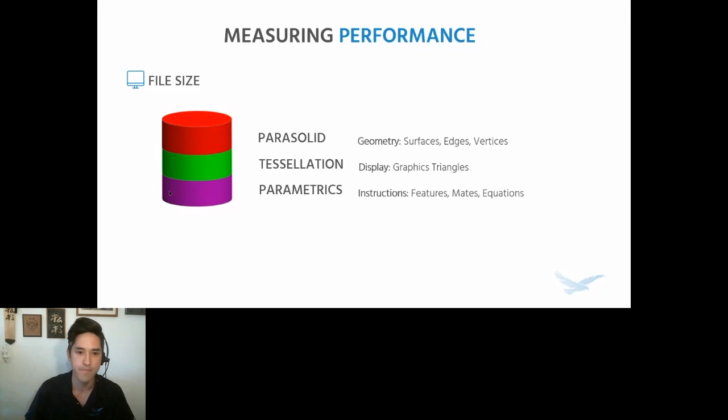All right, next, let's just quickly talk about what happens when you open an assembly. So I'm just going to stay in the assembly realm here and not get to the continued process when you open up the assembly drawing. But the first thing that has to happen is you have to load all the reference parts. That's pretty obvious. You have to get the part files, the sub-assemblies, things like that.

But the mode that you open things up into and any simplification measures could really affect this. So for instance, we were just talking about the 3 parts to a file. If you open up something in lightweight mode, it's not bringing in the parametrics. So it's only bringing in the geometry and the tessellation.

Then it has to go and update parts. So if you've ever opened up something in lightweight mode and you're like, wait, why did some of my parts or sub-assemblies not open up in lightweight mode? Well, one reason might be that they're just out of date. So if you add a feature to a part, the next time you open up an assembly, it's going to be resolved until you save that assembly. Then it can start opening up lightweight.

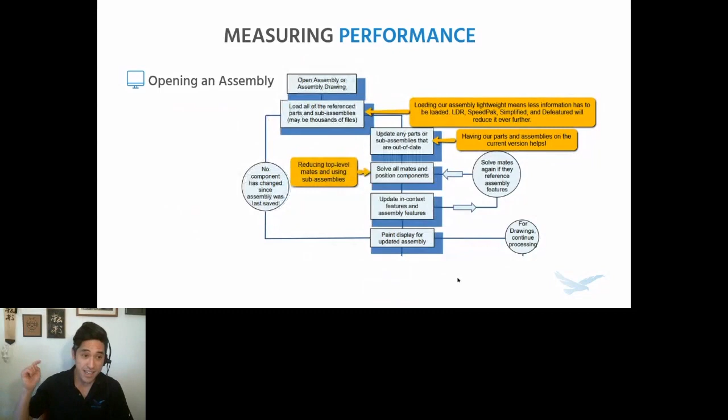All right, then one of the big pieces we can control is it has to go through mates. So it has to deal with any mates that need to be solved at the top level. And the biggest thing to do with this is sub-assemblies, right? So sub-assemblies hide and store lots of mates down inside those sub-assemblies that don't need to be evaluated at that top level assembly unless you have flexible sub-assemblies.

The next thing it's going to do is it's going to update any in-context features. So if you have externally referenced components or you have assembly level features, and you can see that kind of hidden underneath here, the next thing, if I go back up here, it cycles back up to solving the mates again if they're referencing assembly features. So if you can avoid putting a mate onto a patterned component, like the instances of those patterns, that's good because you don't want this to have to cycle back up through there.

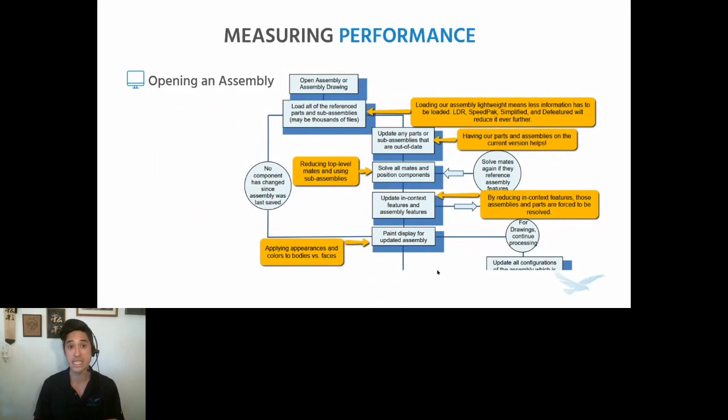All right, and then finally, the ultimate nightmare. Finally, we're going to be applying appearances to bodies and faces. So this is another thing you can control. A lot of times, appearances will be attached to faces, and there can be tons of them in there without you really realizing. And that's something we can deal with, and that can really affect open time quite a lot.

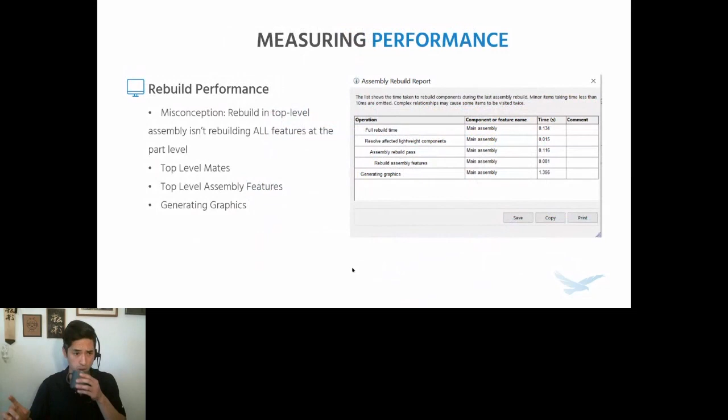Okie dokie. Next thing is rebuild. So there's really only two things I want to mention about rebuild. One, rebuilding does not rebuild all of the features at the part level. Especially if you think about lightweight mode, lightweight mode doesn't even load the parametrics, doesn't load those features. So the assembly rebuild of whatever assembly you're working in is really going to be looking at those features, which are like mates and assembly features, external references, anything like that. And then it has to generate graphics.

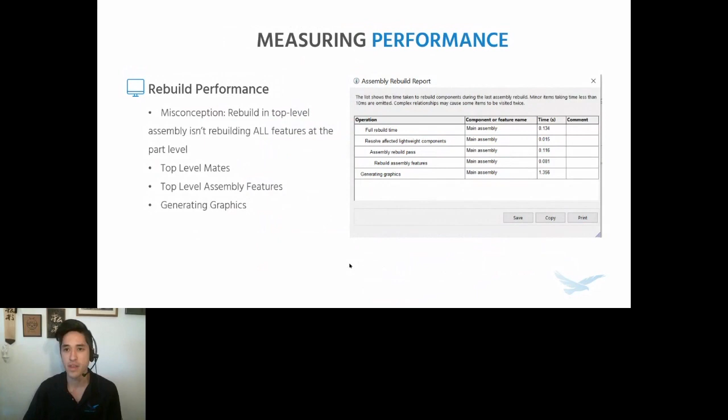So, all right. And lastly, dynamic view manipulation, which is essentially just the fancy pants way of saying panning and rotating and zooming, anything that changes what our screen needs to show us, right? Your graphics card's gonna have to work on this. So having your updated graphics card driver, we're probably always being told. And then in the last couple of years, we have that graphics pipeline, which can actually really improve your graphical performance.

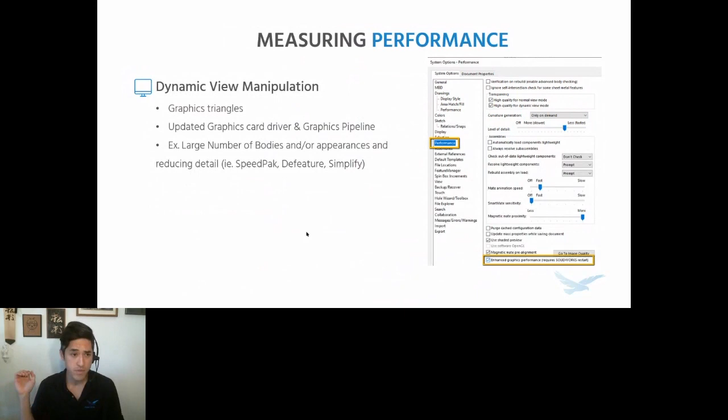In terms of your control over things, you have control over the number of bodies and whatever kind of detail that you could pull out of those. So any kind of simplification measures or anything like that will help, or even just hiding things. If you can't see it on the screen, your graphics card's not creating it for you. Okay, so those are our basic measures: file size, open time, rebuild, and our view manipulation.

All right, so our troubleshooting tools, these are the classics. If you've ever sat in any of these assembly talks or went to training or looked it up, you've probably come across performance evaluation and assembly visualization. And the reason why they always keep coming up is because they really are that important. They are the best tools to sniff out your problem parts.

And a lot of this, you'll hear the 80-20 rule quite a bit. It's basically saying 80% of the benefits come from fixing 20% of the problems, or there's a lot of different variations of it. But this is going to help us find the 20% of components that we can work on to get most of the benefit.

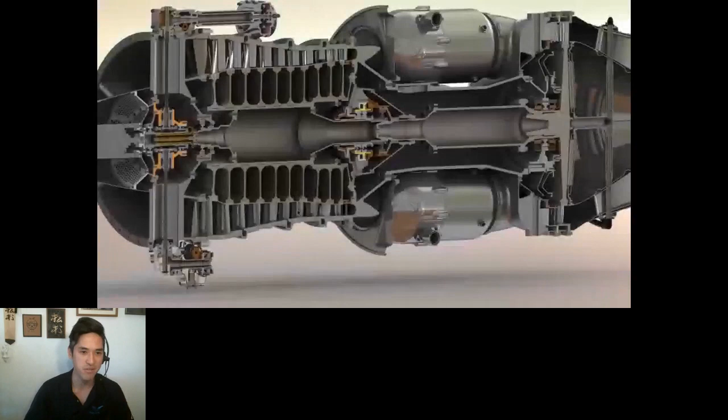Also, as a side note, if you didn't know, 80-20 aluminum, that company with all the extrusions, it's named after that rule. I always thought it was something to do with dimensions, or maybe aluminum content or something.

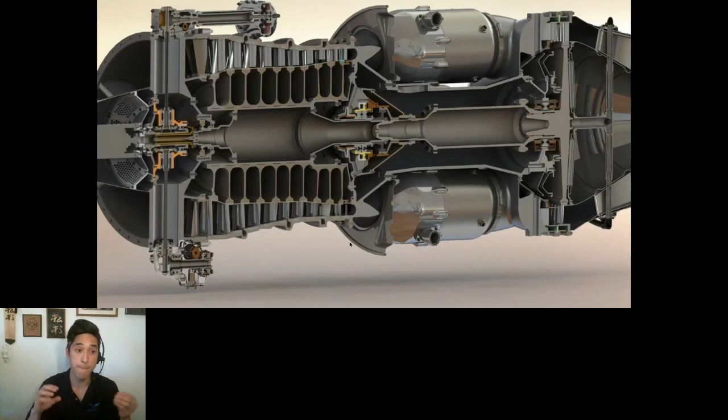I don't know if it's necessarily massive on the scale of some people's range here, but the point was that I didn't know anything about this assembly, and I wanted to go through trying to simplify it. So what can I do to make this thing run better? So let me go ahead and show you this real quick. Okay, so you should be able to see my SOLIDWORKS now.

This is an Orenda jet engine, and I got it off of GrabCAD. So if you've never used GrabCAD before, it's an online repository. It's like a public library of CAD models. And I just went up there. I was like, okay, I want something that wasn't made by SOLIDWORKS, wasn't made by Hawkridge Systems, wasn't made by me. I don't know anything about it, and I want to open it up and start working on it.

And I also had a goal of doing the least amount of work, because I can only show you guys so much. I don't want to make this a thing where you need to spend your whole life worrying about every little issue and every little area where you could possibly simplify. Where are things that you can quickly and easily change to affect the model's performance? And the other part about it is it's a really great model. I wanted to make it so that this is still a workable model, something that we can be affecting change on, and we can continue working on it, right?

On top of that, it's a GrabCAD model, which means it's not my model. It is Dave Rutland's model. So thank you very much, Dave. It's a beautiful model, as you'll see more and more. If you want this, you can go on GrabCAD and get it yourself. Just look up Orenda Jet Engine. It's a Canadian jet engine company that I do not believe exists. But Dave literally just bought the detailed drawings online and then started making everything in SolidWorks. And it's great. So go follow Dave. Maybe give him some work, because I guess he's a self-employed service engineer. But I wanted to not mess with Dave's model too much, but just see where I could get improvements.

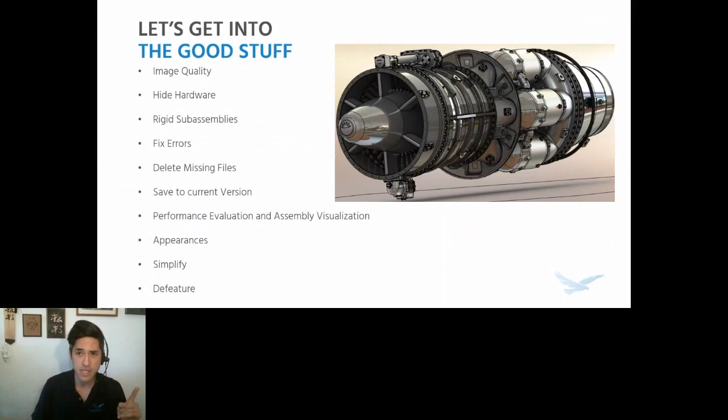All right, so what are we going to do? Well, these are the steps that I went through in order to try to improve the performance of this model. And once again, a lot of these things aren't even tools or really big major changes. Some of them are just things that you have to deal with in any model or assembly. And once again, the name of the game is not messing up Dave's great model here. So the first thing that I did is I went into image quality. I started with this because as soon as you open it, you can make this change and get a lot of benefit from it.

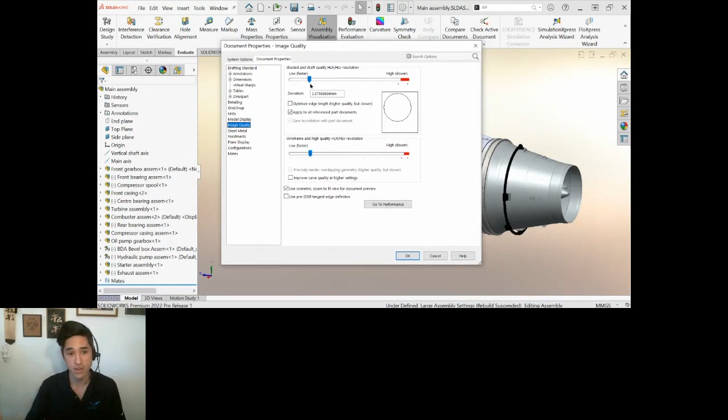So the original location of this, if you go into your document properties, image quality, was about halfway. And this is another thing that you've probably been told over and over again: watch your image quality settings, and don't have it up there. But all of Dave's models were about halfway, which leads me to believe that it was a template. So that's really the best place to start, changing your templates to be lower. If you're using the SOLIDWORKS defaults, it'll probably be somewhere around here. But watch out, because sometimes we pull this slider up to get a better screenshot, or we're sending the tessellation off to a photo renderer. You want to pull that down eventually, because it has a huge impact on the file size depending on how detailed the tessellation needs to be.

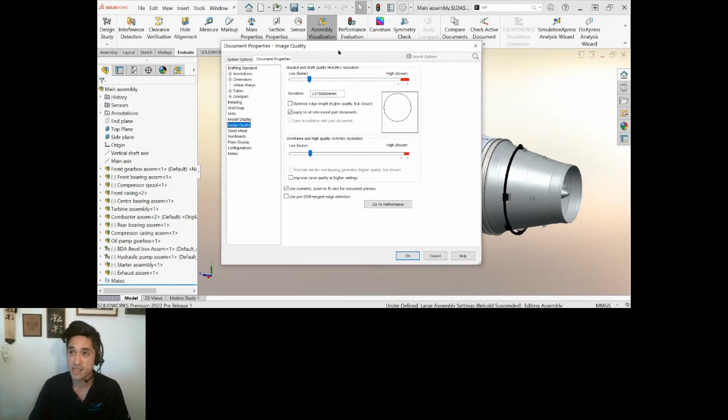So my general rule is any kind of small round thing relative to the rest of the model is going to be your problem. The biggest culprits are always bolts and ball bearings, where the ball bearings are actually modeled, because they're small and they're round. Small curvy stuff is a problem. This has hundreds of fasteners. There's over 900 fasteners. And then it also has hundreds of fins, little turbine fins and compressor fins, and they're relatively small and definitely curvy.

So the only thing I really want to mention here is there's this option, apply to all referenced part documents. Just as a heads up, you need to have things resolved, because you need to have them loaded on your computer when you make this change, if you want that to push down to all those part files. And it's part files, not assembly files.

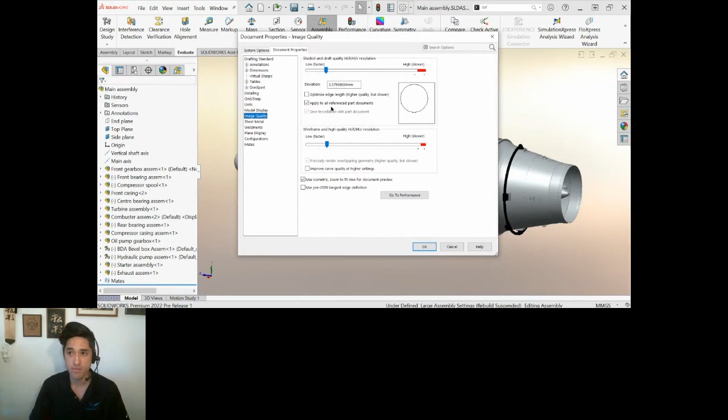Now, whether or not you have it fully resolved, it will still affect this assembly. So you'll still get the benefit here. But if you wanted to automate the process to push it down into further lower levels, then you want to have them resolved when you do that, or do it per sub-assembly if that's easier on your computer.

Now, the other thing that's really nice is if we go into one of our tools here, so performance evaluation on our evaluate tab. Performance evaluation has these general areas here, so I can see which files are opening the slowest. I have my general graphics info, so which ones are the graphically heaviest. And then right below that, I have my shaded image quality. So this will tell me what components are still at a higher or a medium in this case, because there's also a high section here. And you can see these are all assemblies.

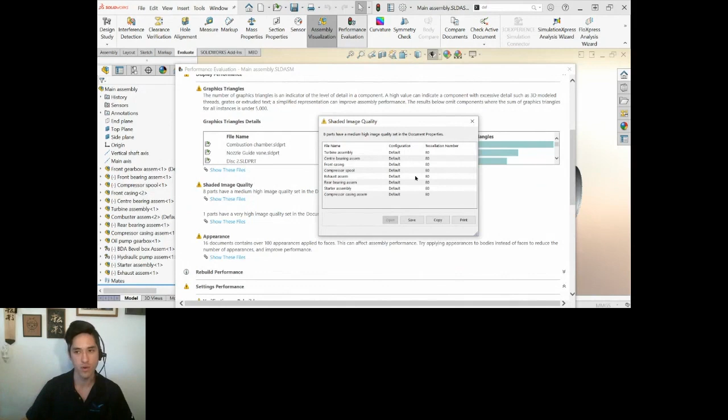So once again, I resolved the whole thing, I moved that slider and then saved the files here. But my sub-assemblies still need that work. And that's just something that as I go and work in those sub-assemblies, I can go and make those changes there. Okay, so in terms of how much did this actually change things, right? So I'm harping all on this image quality and you're going, oh, come on, Sean.

Well, Dave's original settings looked like this, so about halfway, and it was 125 megabytes. When I pulled it down to this fourth tick mark here, it went from 125 megabytes to about 77 megabytes. So almost a 50 megabyte swing just from pulling that slider down. Now, this is just the assembly files. Remember, all those other part files can also pull that down.

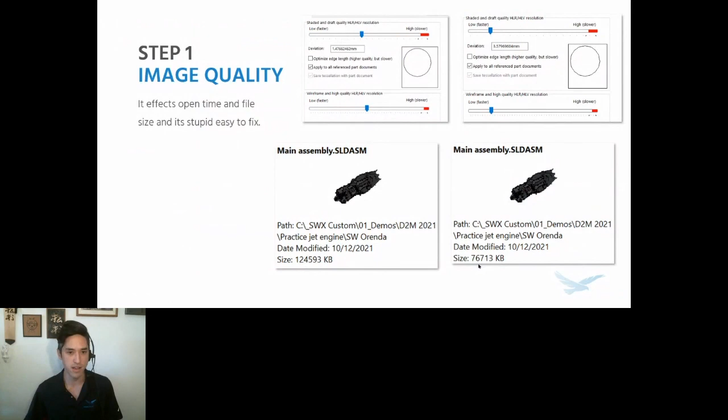And the amount of small curvy things you have will be a huge influence on this. If you have a cube that has a bunch of flat sides, it doesn't take a lot of graphics triangles, so you're not going to see a big change there. Now, let's see what happens if I put it down to the lowest level. If I pulled it down to the lowest possible level, it goes down to 37 megabytes from 125.

Now, the problem is it looks terrible. Essentially what that slider is doing, it's the deviation from the real geometry to the tessellated geometry you're seeing on your computer. So once you go past that fourth tick mark that I have it set at, it really starts to degrade pretty quickly. And in that case, it can make it difficult to even select things, right? Where edges seem to be on your screen won't actually be where they're at. So that can make it difficult for obvious reasons.

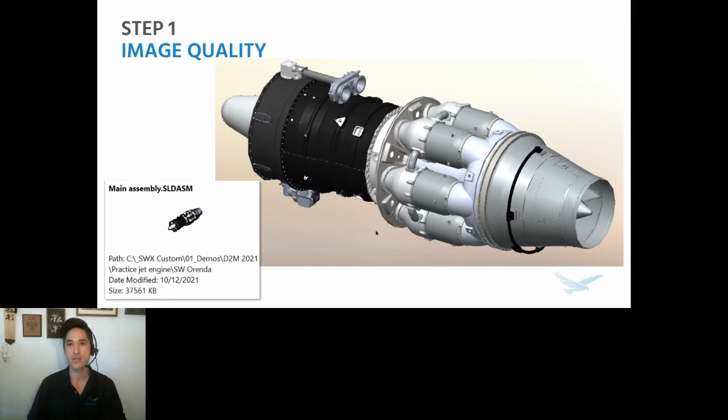Okay, so let's move on. What did I do next? Okay, I hid the hardware. So that's another pretty quick, easy thing to do. And remember, I was saving a lot while I was doing this. I was opening and closing things a lot. And I wanted to try to speed up that process as much as possible.

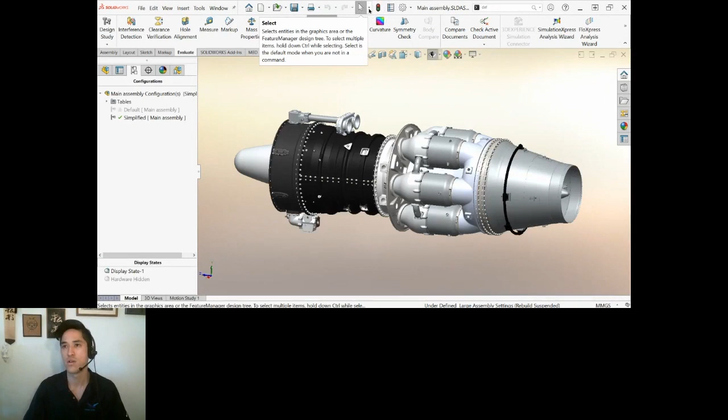So doing this is pretty easy. Let's go back to display state 1 here. And then what I'm going to do is use my selection tools. So up here or on your F5 filter toolbar, if you use this, or if you just want it on the screen, you can use select toolbox, but Dave didn't use the toolbox. He actually made all of these parts.

Like every single part in here, as far as I could tell, was made by Dave. So, I mean, hey, that's great. Select by size is the next best option just because relative to the rest of the assembly, hardware is usually small. And then essentially I use that as my first run. And then as I was working, I just keep adding to the display state by using select identical components.

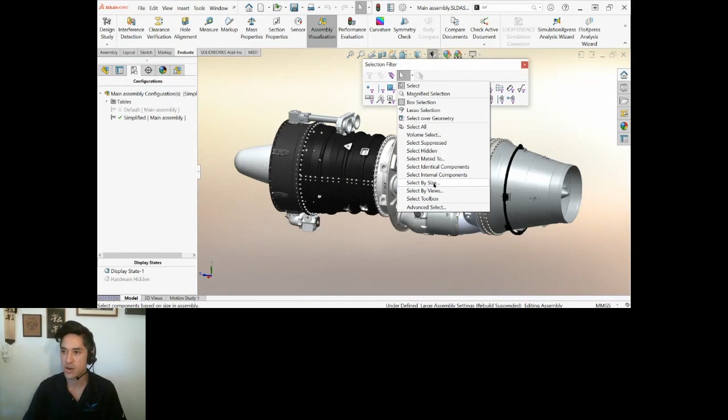So essentially all I would do is say select by size. I use the dynamic option here so I can see on my screen where they're highlighted, and then you can put a percentage in here. So let's say if I put 1% in, I get just under 400 components. 3% seemed to be about the right place to go, so about 974 components.

The one downside to this tool is you can't rotate while you're in it. So the position you're in is what you get right now, but once you say okay, then it's just selecting and then right click and hide. And remember, if this is saved in display states, they are lighter weight than configurations. They also switch back and forth faster. And then anything else that I'm hiding as I go will just continue being saved in that display state.

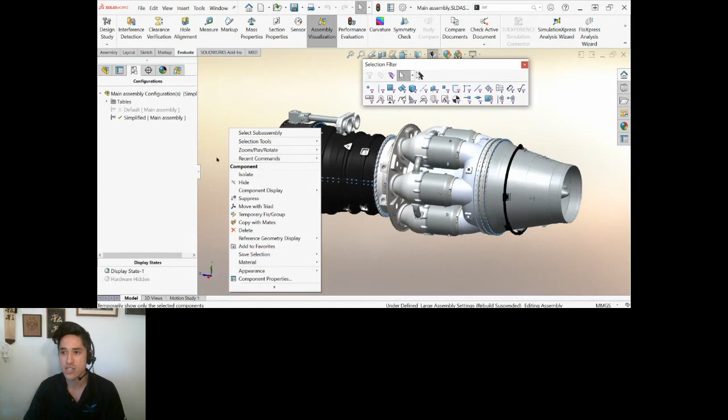Now, when you're doing something like this, and I just selected 974 components, how do I know if I didn't over select things? Well, essentially what I do is I go over to show hidden components on the assembly tab, and that will flip flop. Everything that's hidden will now be shown. Everything that was shown will be hidden. And then you just select components that you want to toggle back to being shown.

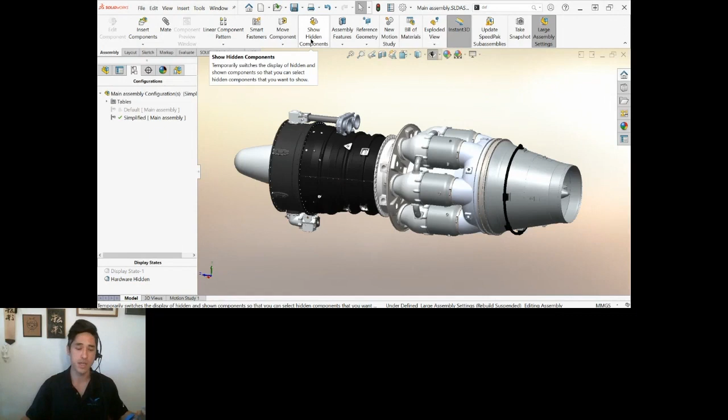So if there's anything that was overdone with this auto select option, you can fix it with show hidden components. And I actually have a little screenshot of that just because it's actually just cool looking. So go down here. This is what it looks like when you do show hidden after that.

I have a good question here. If they're acting as if they're suppressed, will other components lose reference to that part? It'll probably suppress the related mates and things like that. So half the time I'm using it stay loaded, half the time not. Remember, it's just a display state, so it is pretty quick to flip-flop back and forth. For this presentation, I just have everything resolved because there's a lot of operations that you still want things to be resolved for, and I don't have the time to be flip-flopping back and forth.

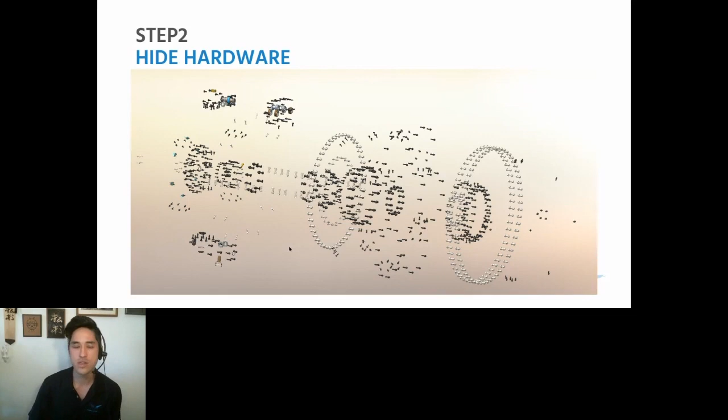Okay, so in terms of the actual effect on this, this is a snapshot from assembly visualization, our visualization tool, which I'll get into in a moment here. But you can see the total graphics triangles of the assembly. So before they're hidden, they're just under 8 million graphics triangles. After just hiding all those hardware components, it was about 4.4 million.

So not quite half reduction, but it's still huge in terms of what my computer has to deal with, especially while it's running this webcast here. Now remember, your mileage may vary because it's dependent on how much hardware you have, and Dave had very detailed bolts, so hiding them really helped a lot. Okay, let's move on here.

Okay, the next thing I did was rigid sub-assemblies. So Dave had 4 flexible sub-assemblies in this file. Now what that does is it brings all of the mates from those sub-assemblies up into the top level for when they're being solved. And so that's going to affect your rebuild. It's also going to affect your open time because it has to deal with those mates. I have a good question here about number of mates in a large assembly. I will talk about that in just a moment because you might be seeing this under 300 mates thing here.

But real quick, how do you do this? It's really easy. This is the moment where you do want to use a configuration. So I didn't use the configuration for hiding components, and I didn't want to suppress those components because that hardware wasn't actually put in at this level. They're all in the sub-assemblies, so suppressing them will affect those sub-assemblies. Hiding them is just here in the file.

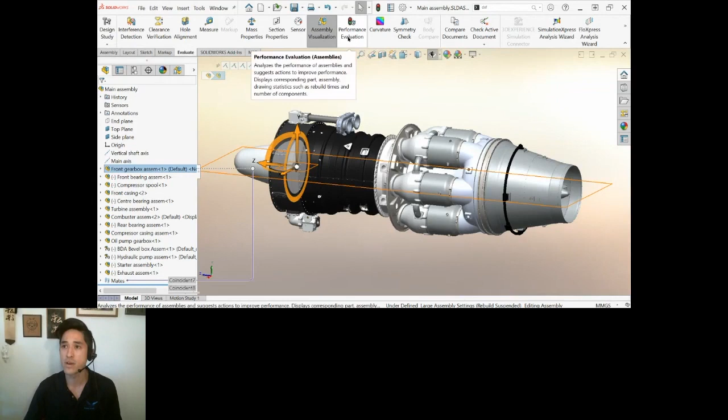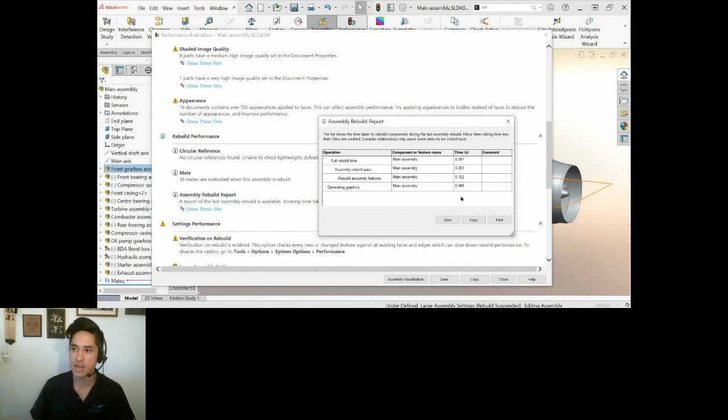And then in terms of the effect, well, if you go into your performance evaluation, there is a rebuild performance section here, and it'll tell you how many mates were evaluated when it's rebuilt. You can also use this little rebuild report here, and it'll kind of break down the last rebuild to see if it was really slow all of a sudden, or you're not sure why. It'll break down those little steps and what caused the slowdown.

Now, compared to the flexible subassembly, it had 648 mates. So it went from 648 down to 38 by making it rigid. Now, once again, mileage may vary because this is very dependent on what your mating scheme looks like. Dave did a really good job of having sub-assemblies at the top level of this, but there's not many sub-assemblies lower down. So the depth of this assembly is not very far. So we could probably improve performance at those sub-assembly levels by having further sub-assemblies down there.

Now let's talk about this 300 mates situation. So I have said 300 mates many times, and I didn't really know why I was saying it, just something I heard, it made sense. Okay, what it really is, is that the time it takes to solve mates is proportional to the number of mates squared. So having 300 mates is a lot better than having 400 mates because 300 squared versus 400 squared. It really just becomes you want to have the least amount of mates possible, but having a large amount is really going to degrade performance a lot faster because it's exponential.

And then as Ryan's saying in the chat there, any of your standard mates solve faster, and it doesn't actually benefit you to have a fully defined assembly. So you don't need to do things like locking the rotations on your concentric mates. If you can avoid distance mates and angle mates, those are slower. Any of the advanced or mechanical mates are also slower in general. But if you can remove number of mates, so someone's saying, what about width or symmetric or maybe profile center? If you can remove the number of mates by having those ones, you could see a benefit there.

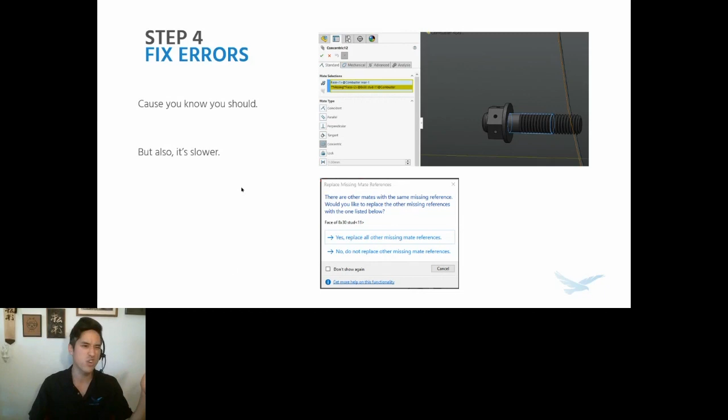But if you have a true over-defined mate situation, that is something you want to figure out, because the mate tool is actually really good at having over-defined mates where they are in accordance with each other, so they don't conflict. But once they're conflicting, that really slows down your rebuild or anytime the mates have to be solved. So here is just a quick little bit of information for you. So just go ahead and read through that while I get a sip of coffee here.

No, don't read through that. Okay, so that is a solution from the SOLIDWORKS knowledge base, but really all you have to know is that part of solving mates is that SOLIDWORKS has to figure out the order to solve mates. So it has to parse this mate group here. And if errors are found, it has to go process those mates again and try to see if it can find a good result, or if it needs to put up errors or warnings. So when you have a true over-defining case where things are conflicting with each other, this will be much slower, right?

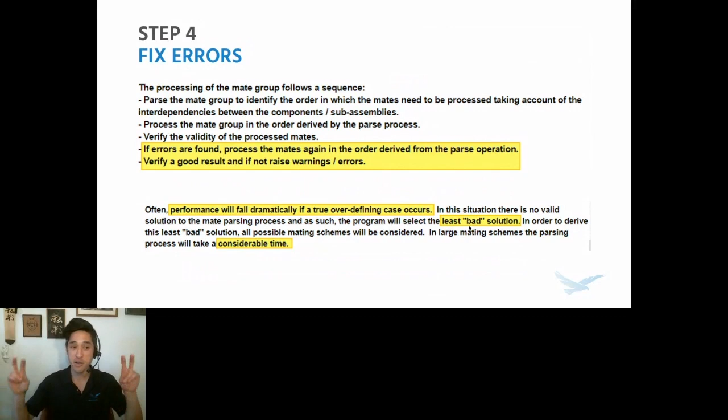And especially, I love this official solution from SOLIDWORKS tech support where they have the least bad solution. So there's that. But if you have things that are conflicting, that's just one of those, hey, who wants to see all those crazy colors? You got to go fix the mates.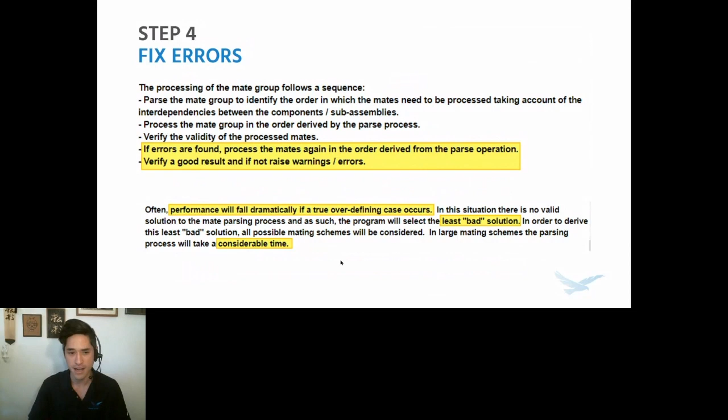Similarly, deleting missing files. This is obviously going to be very dependent on how many you actually have and how you got to delete them. I kind of waited because half of them were in sub assemblies, so I would have to resolve those sub assemblies to work on them, and I was trying to get as much performance boon as I could.

But the thing I just want to mention here is that when SOLIDWORKS cannot find a component, it has to go through 7 steps of searching for it before it asks you or decides or suppresses it. So if you have a lot of missing components, you got to figure out something to do with these. And this is another one of those, who wants to see these error messages over and over again every time you open it? But you got to either find that component or get rid of it, so it's not searching all over the place for it.

Okay. This is another kind of no-brainer here, but saving to the current version. So everything that Dave had was in 2019. So as I was working on things and saving, a lot of things were just automatically getting saved to 2022, which is what I did everything in. But at some point, I had to get all of the files into 2022.

Now, the benefits you're going to see from this will definitely vary because it depends on what version you're going into. Is the version you're going to, did they work on performance? Some years SOLIDWORKS puts a lot of work into just performance updates and improvements. And then if you have really old components, then you could see file size decreases and a lot of performance benefits.

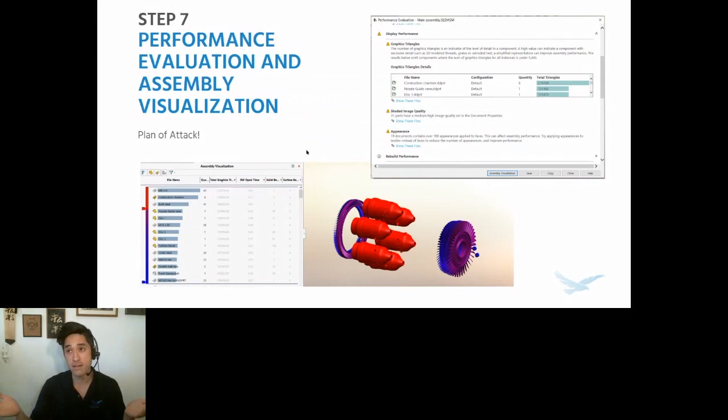So we have to use assembly visualization and performance evaluation to help us out. So where did I go first? Well, first I went to appearances. This is another one of these maybe weird ones that you might not have thought about, or you might not think is an issue. But if you go and take a look, the number of appearances that some files could have could be way higher than you ever would have expected.

So you might be looking on here and say, there's no way I have a file that has 4,000 appearances. You could have one right now, hiding. And this oftentimes comes from two places. So imported files. If you have an old IGES file or something that imported a million surfaces, it could break up the appearances into a bunch. It's not crazy to have a complicated imported file that has 10,000 appearances, and if that's in an assembly, it has to paint all those appearances when you go to open it.

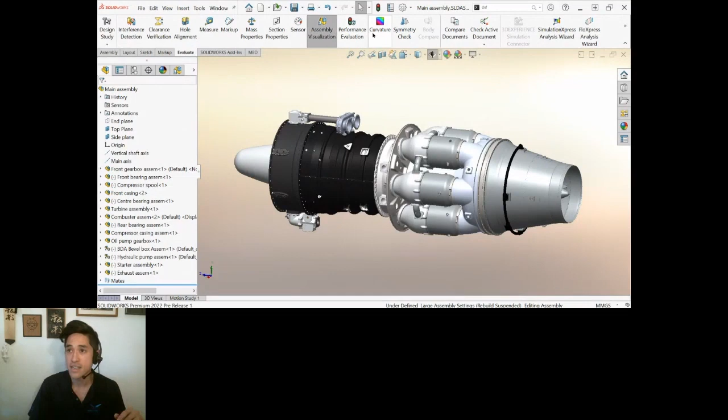So how do you deal with this? Well, Dave didn't have any imported parts that I could find. He made everything. So even in that case, how did this even happen? So in performance evaluation, I'll go down to appearances here.

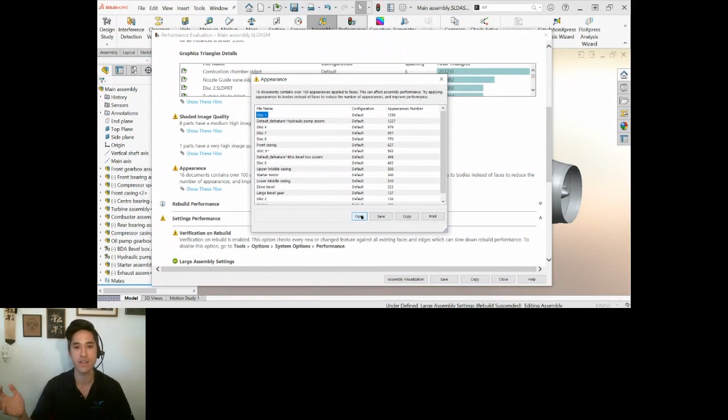And you can see I already did a little bit of work in here, but the nice thing with performance evaluation is whatever you're doing, you can go in and hit open on those files. So if there's a file that has some kind of issue here, then you can go ahead and hit open. It'll go open in the background. So let me jump over there.

Alrighty. Now we're not going to talk about the fact that Dave did a bunch of things as multi-body parts, and then never broke them out into sub-assemblies with like patterns and stuff, which is what I would have liked to see. But hey, we won't worry about that right now.

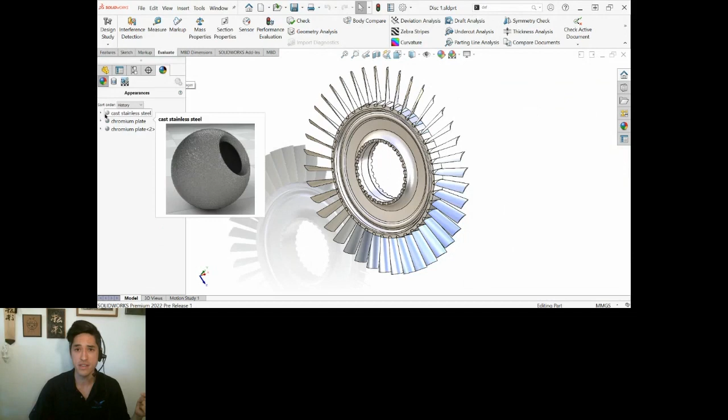So we go through here. We have 41 bodies. This is one of 9, I think actually 10 discs on the compressor here. And if I go to the appearances, okay, I got cast stainless steel on the whole part, no problem. Chromium plate, okay, this looks like a lot, but these are all just the individual bodies, so not a big deal. Then I got another chromium plate. Yeah, okay. So do we think Dave went and clicked on 1,209 separate faces? Probably not, right?

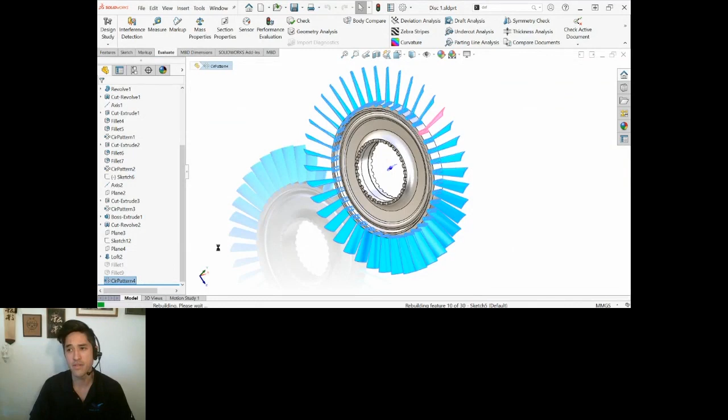So what this really comes down to is oftentimes in your patterns, if you're not really thinking about it, like this thing, it doesn't look like there's even that many faces, but there's a bunch of little tiny filleted faces on each of these fins. So if I zoom in to this area, you can see there's these little things to fit those in place, and then they're filleted on the edges here.

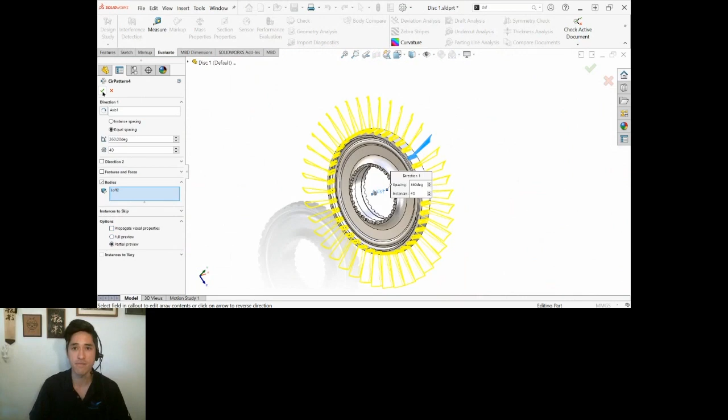And what happens is Dave did set the appearance originally to just that one body. And then propagate visual properties was kept on. So a lot of the options, especially in the pattern property managers, are sticky options. So they will just stay on every time you use it. So with that on, that is what broke that appearance off into 1,200 faces. So that was the whole issue. It's just that option being turned on.

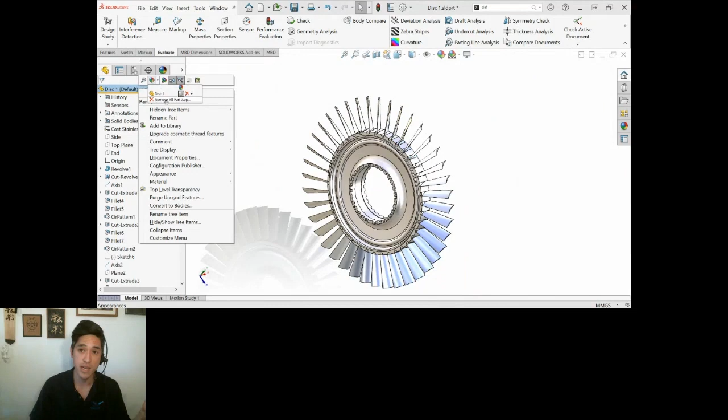Now, if you have an imported part or you don't really care to figure this out, there's 2 ways to get rid of appearances. If you want to keep display states, then you can always go to the top of your tree and remove all part appearances from that display state. Or if you don't care about display states, it should be faster just to remove all display states from here.

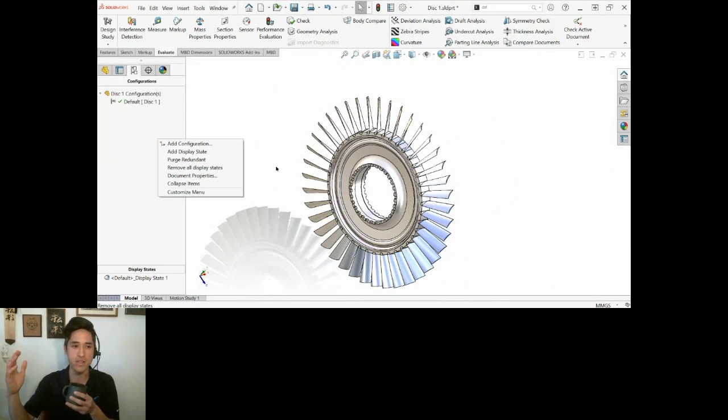Especially if you have the imported part problem, where you had like 10,000 of them, it is going to be slower to deal with them. So removing them all is probably a good way, and just start over and then add an appearance to the entire part file, or maybe bodies or something along those lines. Okay.

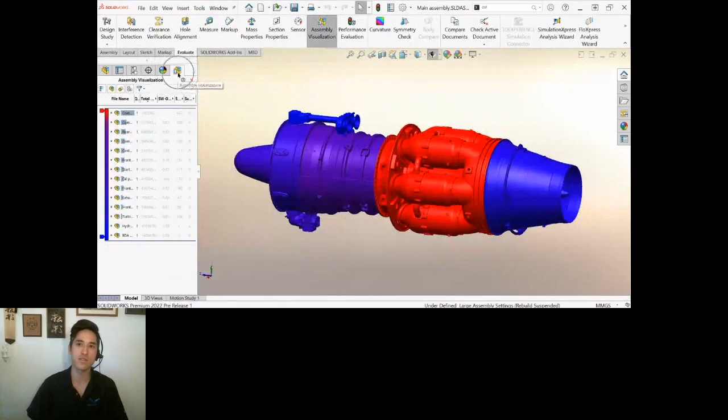So what's next? Well, we have to figure out where to focus our work here. So let's get into assembly visualization, because I haven't really gotten into it. Assembly visualization, you can see it was already on. It's on a little tab over here. And what it does is the graphical organization of your assembly. So I have custom little columns up in here right now.

So total graphics triangles is all the graphics triangles of all the instances of this thing. I've got my open time for these sub assemblies, as you can see, right through there. Number of solid bodies and surface bodies. Those things can also help you with imported parts once again. So if you're not quite sure at a top level, you can see, oh, why do I have something that has 400 surfaces all of a sudden? And then we can go deal with that.

Now, when you open this up originally, it's just going to have mass. So you can go over to the side and add columns. You can hit the more option, and that will give you the list of things that you can add to these columns. And then ultimately, you can save this as a style and then just load that into whatever files you're using.

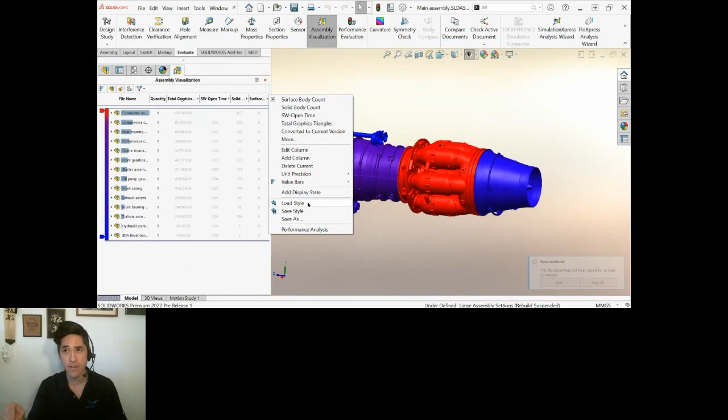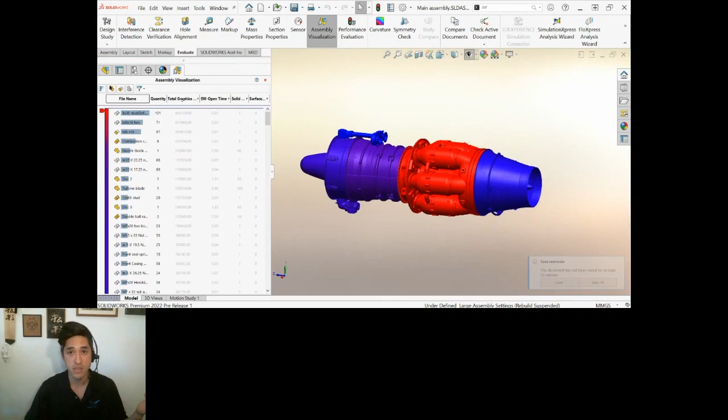If you create these styles and load it, every time you use assembly visualization in that file, it'll just automatically have these columns. So you won't have to keep changing it over and over again. Other things to note here is that there's different ways of grouping components. So right now I have it in the nested view, which will show me all my sub-assemblies. If I want to see just individual parts, I can undo that to flat view here. Grouping components, I'm going to keep it grouped because if it's the same component, I want it to be grouped together.

And then there's actually a performance analysis button that will just give you total graphics triangles, open time, and then the individual files rebuild times, not the assembly rebuild time, but the individual files. That one's not sticky though, so it'll keep going back to mass if you use that, but it's easy. So other than that, I can click on these columns to sort by whichever column, and then we'll end up getting it to be color coded based on that column.

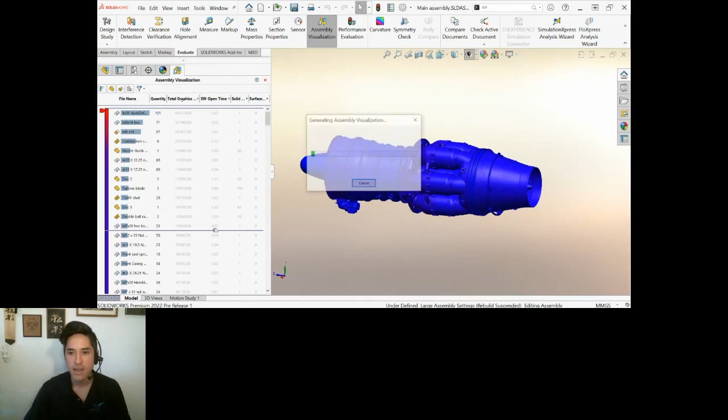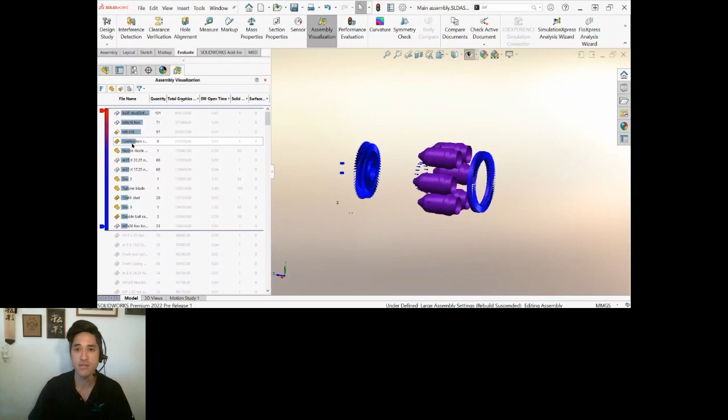The other thing that's not super obvious that I really like is if you go down to the very bottom, you can grab a rollback bar of sorts. And if I pull that up, I could say, let's see everything that is above 100,000 graphics triangles, and it'll go and hide all the other components. Now you can see I do have my hidden components loaded, so those will show up. So you can see my number one thing is actually that this 101 fasteners here is the number one single component. We can see other files here on our screen. Here's some of those cool compressor disks there.

Sean, if I can interject for a second, just because I want to add on this. I see this tool presented all the time as diagnostics for the graphics triangles like you're showing, but I also use this for some of those steps you did earlier on, like suppressing tiny little components and hiding them. I'll add a column for volume, and then I'll just sort by volume, and then I can just shift select the tiniest little parts in the assembly. And by using the assembly visualization, you can really see exactly what's going on, what you're hiding, what you want to eliminate and what you want to keep.

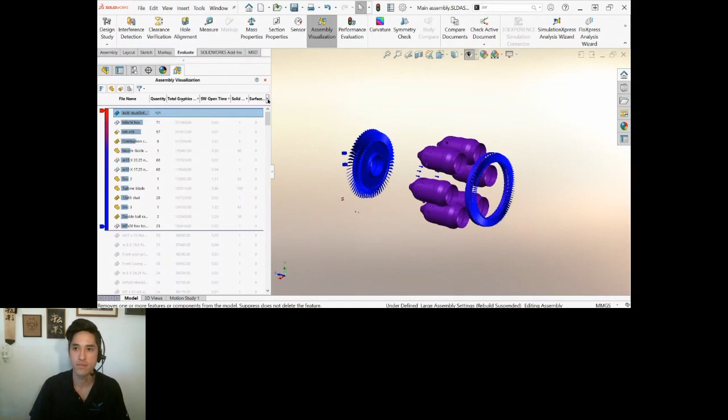So for things like if you're stripping down a model to share a STEP file and you don't want to have all the detail in there, or if you're prepping a model for a simulation, this gives you a lot of options in terms of how to sort and visually see what's going on inside the assembly. Yeah, that's great because anything that you're sorting through here, you can create as a display state. Whether or not you want the colors, you can turn those off, or you could have a different color system. But yeah, it's a really good way to save ways to sort your feature tree rather than always navigating through your feature tree.

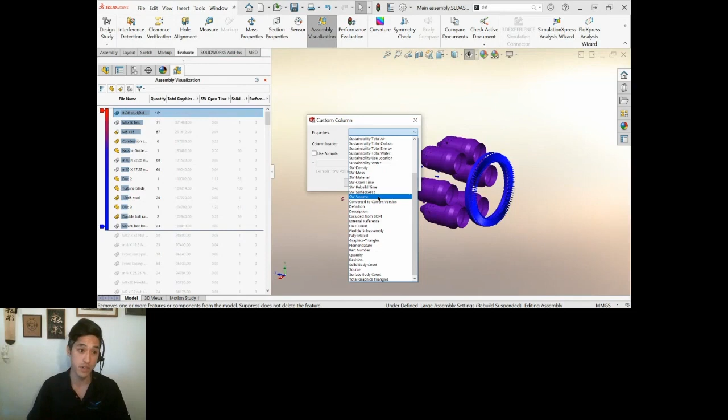So the combustor assembly, this big red area, by far has the largest number of graphics triangles. And then if I open this up, I can see that there is a sub-assembly that has the largest amount of graphics triangles just for that. So I have this combustor assembly that I can go ahead and open from here, or as Ryan was saying, it's really easy to go and hide, suppress, whatever your selections normally would have been.

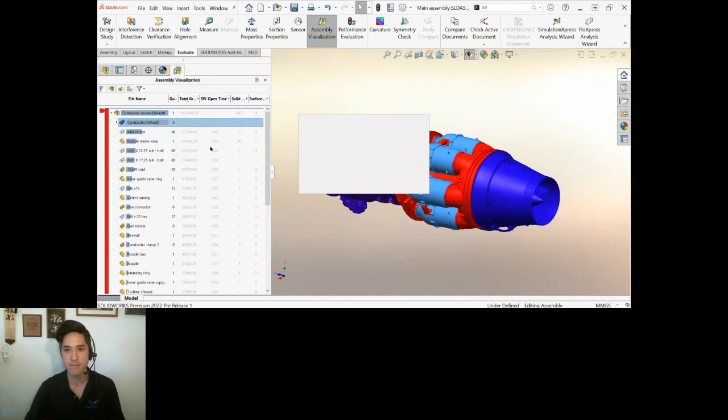And then what I'm going to do is, let's actually get to the two tools that I use to actually start making some kind of simplified version of these files here. Once again, these are things that you might have run across before, but I'm going to present simplify and defeature. They're very different from each other. Simplify I actually prefer, mostly because it's predictable.

I understand very well what happens when you suppress features or you unsuppress features, and that's all it's doing. So it's easy to use. It's fast, but it's fast for me. My computer may be chugging along trying to deal with this, depending on how many features it's going to find. And then the downside is it requires features, right? It needs to be something built in SolidWorks that it can then turn off those small features. And remember, small round stuff, that's what's really going to be getting you.

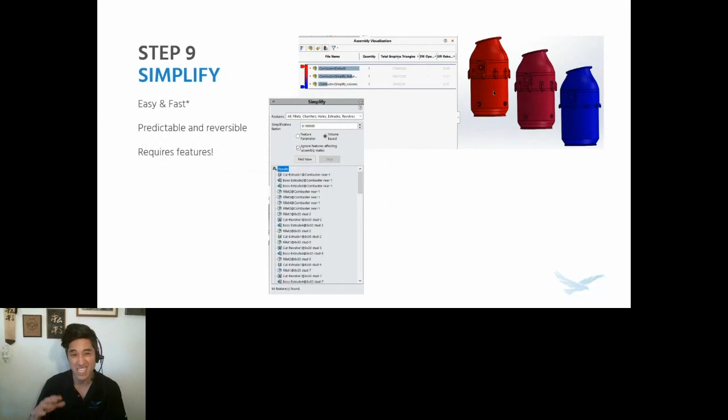The other reason why I specify on this combustor is there's 6 of them in that assembly. So if I can focus on just simplifying this, then I get 6 times the benefit. Let's go look up our simplify here. There's 2 options, feature parameter and volume based. Generally, feature parameter tends to find less features in my experience. With the default simplification factor, feature parameter is looking at the characteristic dimension of a feature, like the radius of a fillet, versus volume looking at the volume of the feature. They're both comparing them against the component's volume, whatever component you find that feature in.

I also turn on ignore features affecting assembly mates, but that's just going to affect this assembly's mates, not my higher level ones. So be forewarned, this definitely can cause you mate errors as you're swapping these out in your higher level assemblies. Hopefully, since they should all be mostly small things, it's usually pretty superficial, and oftentimes replace references can do a lot to help you. In this case, the volume option found 95 features. It's not usually that huge of a spread, 16 versus 95, but generally the volume one tends to find more.

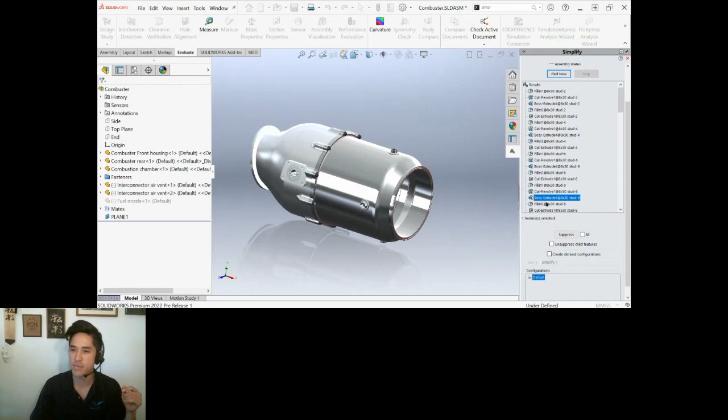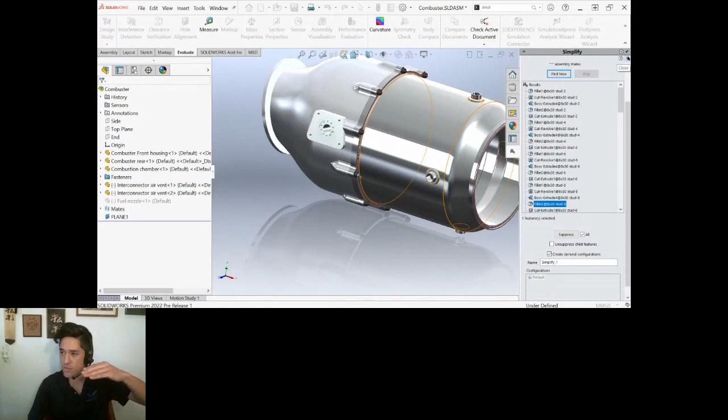I can see what they are. If I select on them, they'll highlight on my screen here. Looks like a bunch of them are for these little fasteners here. And then generally, I could say suppress all of them. And then I like creating the derived configurations. This is important because this is going to make a configuration for each of the components and the subassembly I'm working in and activate them all for me. It does take a second because it has to run through suppressing all those. So I do have a couple already created.

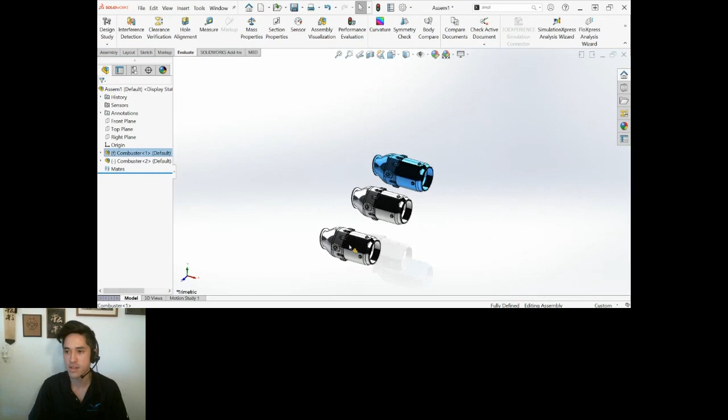The way that I like to compare these is still using assembly visualization, but I want to look at it like the top level. So sometimes I just make little dummy assemblies. I'm not going to save this, I'm just going to throw them in there. I've got 3 configurations, so I'll activate 3 of these here. Okay. And then I can run assembly visualization. This is one of those times where I'll just use performance analysis. This button right here, we'll just pull out graphics triangles, and we can see the difference here.

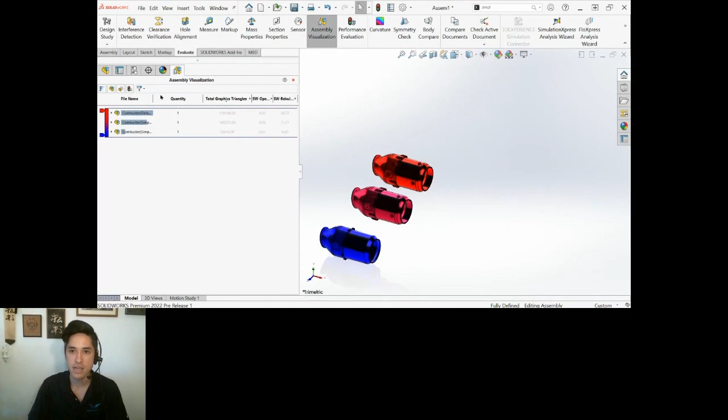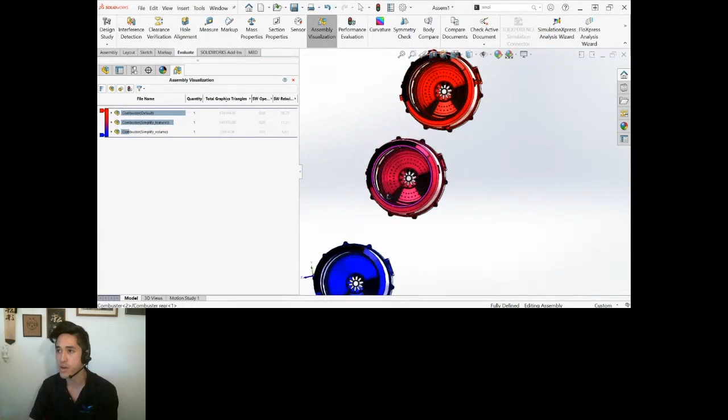The default has about 180,000 graphics triangles. Remember, we have 6 of these subassemblies. So 180, then we get down to about 145, and then we get down to 23. A lot of this is because of that bolt simplification. But if you look on the inside, there's a bunch of patterns on some of these components here, so that's probably where we're also getting a lot of benefit. Once again, the reason I like this tool is because it's predictable, and I don't have to swap out entire components, right? It's just changing configurations.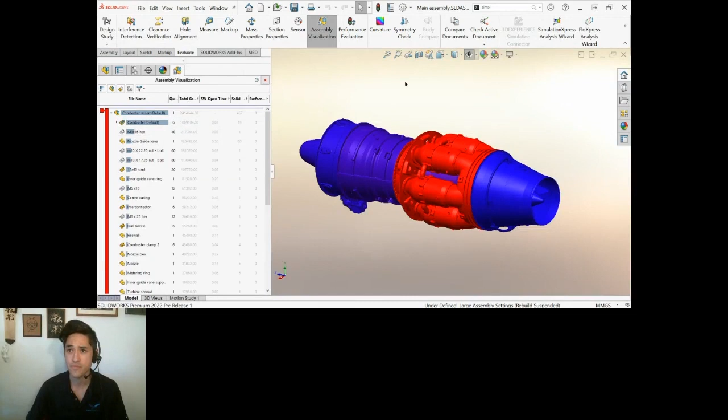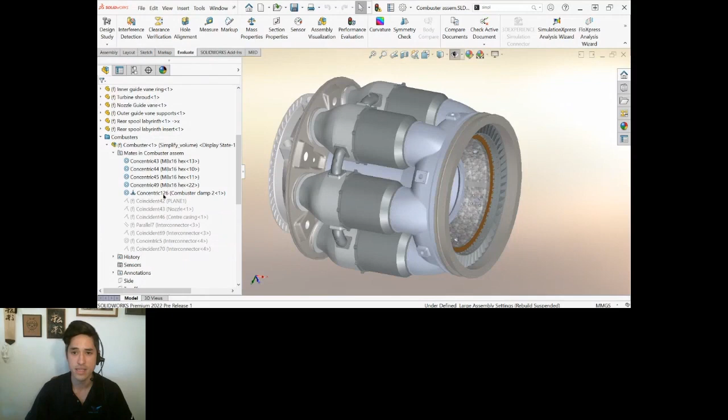So I now have configurations to use. Let's go off into my combustor here. I would still make a simplified configuration for the combustor. In that simplified one, I can swap out for my simplified combustors here. These ones did have a mate error. I had one mate, one of these concentric mates or something like that, that needed to be fixed. And then I was able to propagate that to the other instances, so it was really easy. In this case, I only had to fix one mate, so that's probably worth it. And then ultimately, in my top level assembly, I need to swap out this big combustor. Remember, I have a simplified configuration here.

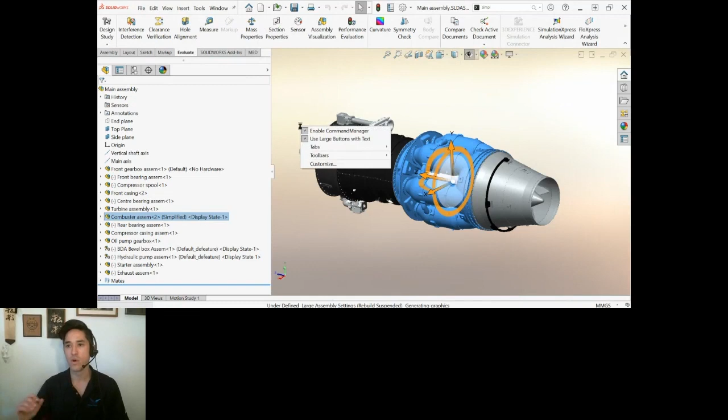And I would say, okay, well, let's use the simplified configuration for this combustor. So once again, I wanted to leave the originals alone so I can always go back to my detailed if I need to show it or look at it or do some other kind of evaluation from there.

So the other thing that we did was a defeature. So I've actually been kind of defeature resistant for a long time, just because I don't like the original defeature. You create a part from an assembly, which is great, and then you swap that out in the assembly. So if you have purchased components and you really don't need to reference that full assembly that someone might have sent you, that's great. But if you're trying to use this on your own design, then that's not that great, right? Because I don't like having a separate file out in the ether and then have the simplified part in my assembly, or maybe you have configurations or something like that.

But in 2019, the silhouette defeature came out, and that actually gives us the option to just save this as a configuration. So then at my top level assembly, I can have a simplified configuration that references the defeature. I can still have my detailed that references the detailed subassembly here. And I don't have to do any extra file management or anything like that.

So I like that. The other thing that defeature has always been great about is that you don't need features. So unlike the simplify tool, I don't need features. So if I just want to run this on imported parts, then that's great. I can simplify it out. I can take out a bunch of internal detail. That was actually the other thing. It simplifies and takes out the insides.

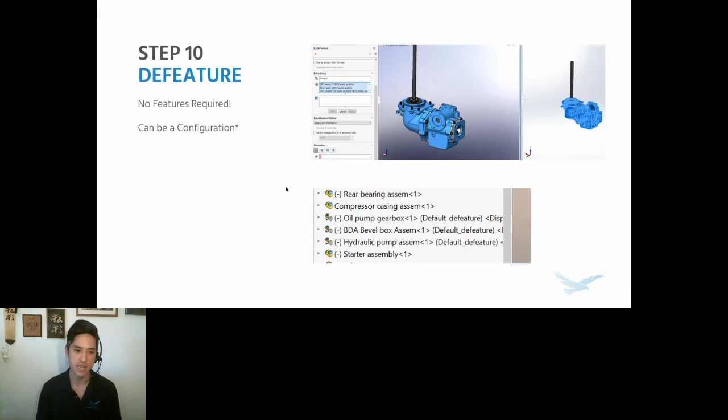So it really can simplify it quite a bit, but that process can take a long time and it can be unpredictable, which is another reason why I wasn't the biggest fan. But the silhouette kind of solves that as well for me. You still should use the original one if you like it, but let's take a look at this.

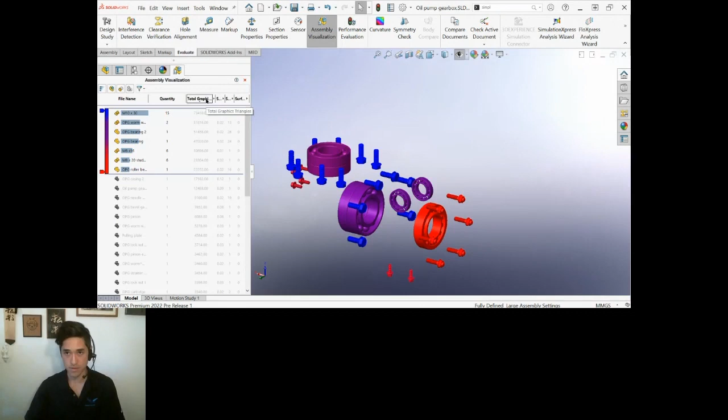So if I have this component, if I look at where simplification could happen, just a note here, you can see the top, in terms of graphical denseness for these components, is fasteners and then bearings. Do you need your ball bearings like this, or can we just extrude over the geometry? We won't get into this.

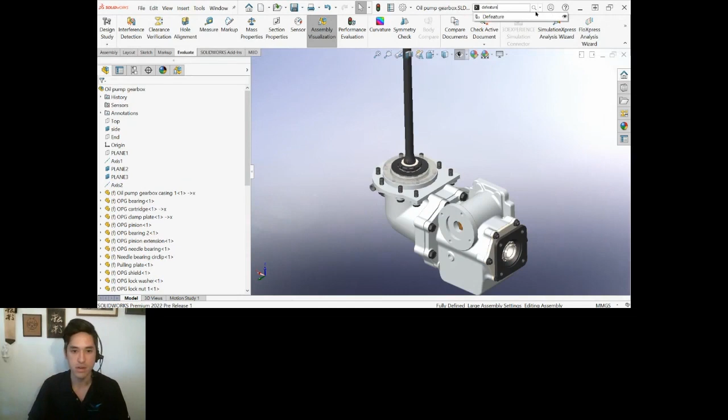Once again, okay, I don't need this information at that top level. I'm choosing not to use it at the top level. You can decide if you need it or not, but let's go ahead and go defeature. Okay, so this is the silhouette method versus the original simplify geometry method.

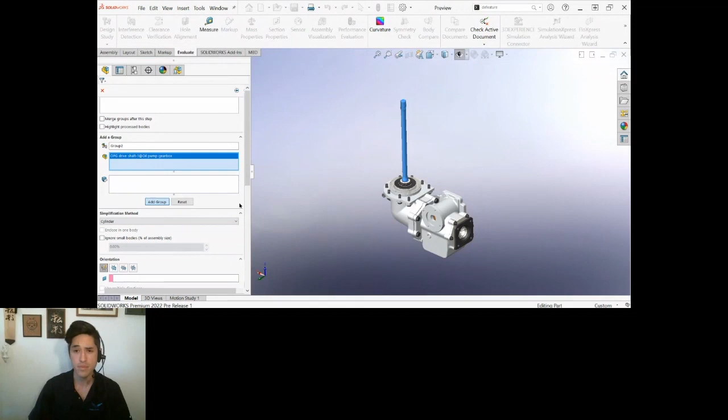And the silhouette method can still simplify the geometry if you want it to. So if I select this piece, I can tell it, hey, that's basically just a cylinder, and then it'll go and simplify it and give me a little preview. A lot of these simplification methods don't work super great if you can't represent the geometry as a silhouette from one reference plane.

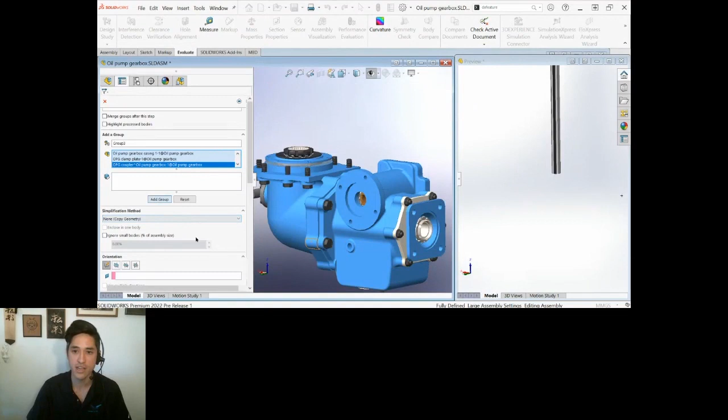But something that's really nice is that there's a none option. So I could just say, you know what, here's some outer parts that I need for mating. Just don't do any simplification. And then the simplifying can be a lot faster. It's just going to essentially wipe out the internal components. And I can still have all my mating surfaces.

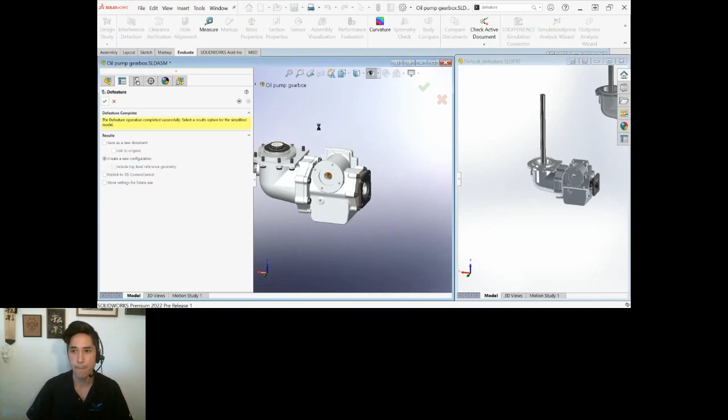And then I can go through here and say, create a new configuration, include my top level reference geometry, just in case I need that for mates or something like that. And then I'm just swapping out a configuration at my assembly level. So this works a lot like a SpeedPak in that there's an update option. So if you change something, you can run an update and it'll go and refresh that.

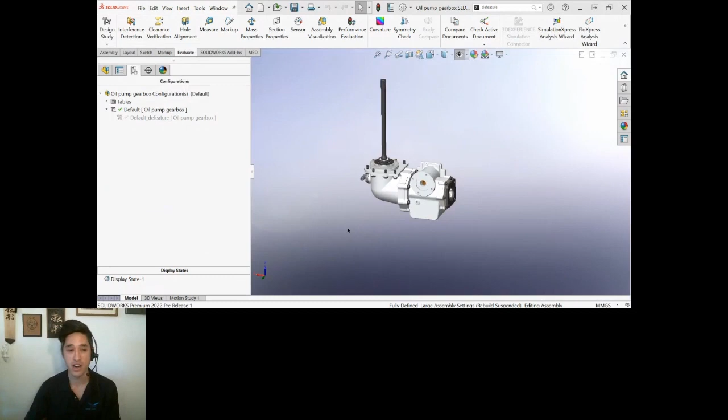But it has geometry. So the other thing that's really cool is it automatically transfers the mass of the original assembly to this defeatured assembly. So I can still get accurate mass properties and stuff like that at my main level. So that's why I like it. You can decide if you want to use it or you like the original way or you just don't want to do any defeatures.

But that was the level that I felt, okay, this is reasonable for simplifying and not messing too much with Dave's things. And I got rid of those dang bearings. So, okay. So that's pretty much it I have for you.

There were some honorable mentions that just got left out for this time that were not necessarily something I wanted to do. Some of them required replacing components or SpeedPaks. It's just graphical, so you can get a lot of improvement, but you can't do as much with them. So I kind of avoid them sometimes.

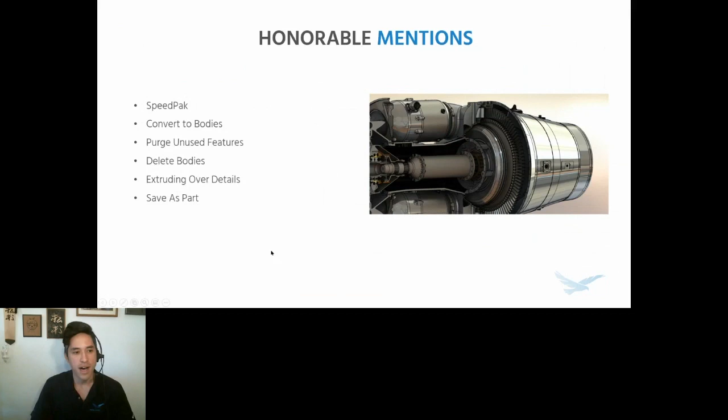One thing that I didn't explicitly show, but I just kept harping on over and over again was this: a little bolt simplification goes a long way. So if you have detailed bolts, please stop breaking our hearts. If you're talking to any application engineer, they'll just be like, oh no, the detailed bolts here. This is just the combustor assembly that we were looking at. The difference between having all detailed bolts and just simplified like this was 60,000 graphics triangles.

Remember, I was getting all happy about going from 170 down to like 25 or something. And half of that improvement was just the bolts. So, just something to think about. Ball bearings are the other big ones. Can you just represent them with the inner and outer diameter in a simple cylinder or something like that? Maybe some fillets to make sure things fit. But if you can do that, you'll probably be happier with your performance there.

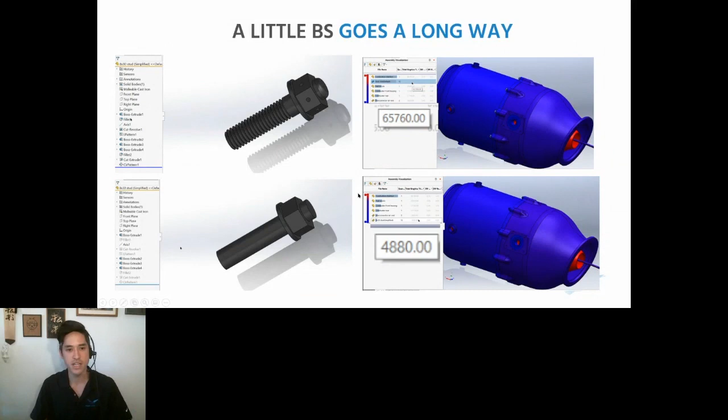Okie dokie. So thank you, folks, once again for being here. I know I really sped through a lot of stuff and we took a lot of time, but hopefully you can get something out that's actionable for you. Remember, half of those things weren't even things that really changed or affect my file, but I can pull out a little bit of better performance from it.

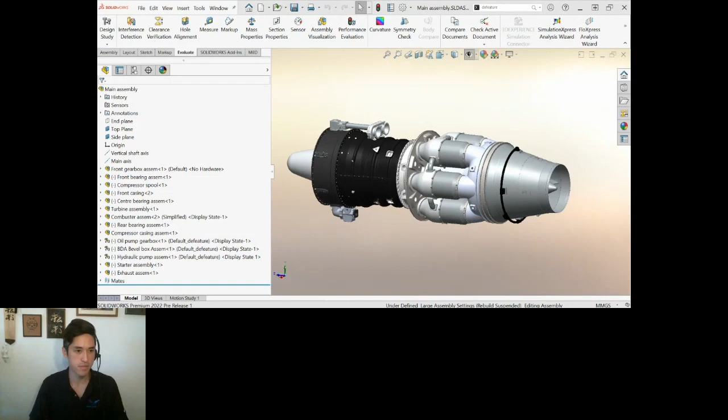But someday you edit the model and the faces might change, and hopefully the plane would not change, right? Because it was defined deliberately. So it should be better from just having your assembly not break on you point of view.

And then we had a question too: is it a good idea to mate everything, fix the parts, and then delete the mates? That's the really rare situation that I would do that. Maybe only if you were trying to, like I mentioned earlier, share the part externally to somebody that you didn't want to have all the intelligence of the model. Yeah, because you might be shooting yourself in the foot with that if you need to move anything at all. If you are truly just going to fix them, you don't need to use mates for positioning.

I mean, that's definitely going to help your rebuild performance, right? But then you're not nearly as flexible in terms of updating things in the future. There were definitely a couple of assemblies here where I realized like 10 minutes before the presentation that I had 500 mates in that combustor assembly and I didn't need them right now. So I just suppressed them all and fixed everything just so I could get through this. But that's not a thing that I wanted to do if I was actually using that.

I would go to creating sub-assemblies first, right? And just try to reduce those top level mates. Because the very top level had just under 40 mates. The rebuild time was ridiculously fast. It was like half a second or something. So I would rather have 100 mates or whatever at the top level and then everything down in sub-assemblies than completely fix things. But if you can get away with it, then that's definitely good.